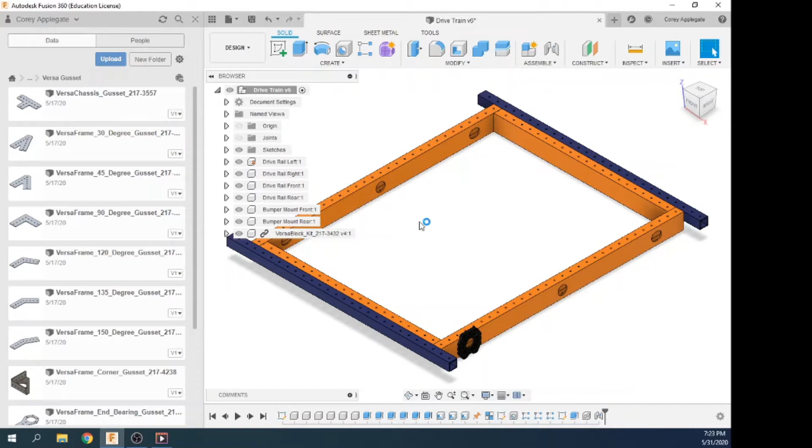To get started, I already added one of the Versa blocks to the lower left corner. We need this to show you a small collision that we have and show you why we have to modify our corner brackets. To begin, I'm going to go to our assets library. Picking Versa gussets, I'm going to find the 90-degree gusset and drag it into our project. I'm going to rotate this to better fit this front corner and bring it down here a little bit closer to where we're going to assemble it.

This time we are not going to use the rigid group. We're going to actually apply a joint. In the joint command there are many different types of joints. There's the rigid, the revolute, the slider, cylindrical, pin slot, planar, and ball. There are many YouTube videos that go through each one of these in great detail. Today we're only going to look at the rigid.

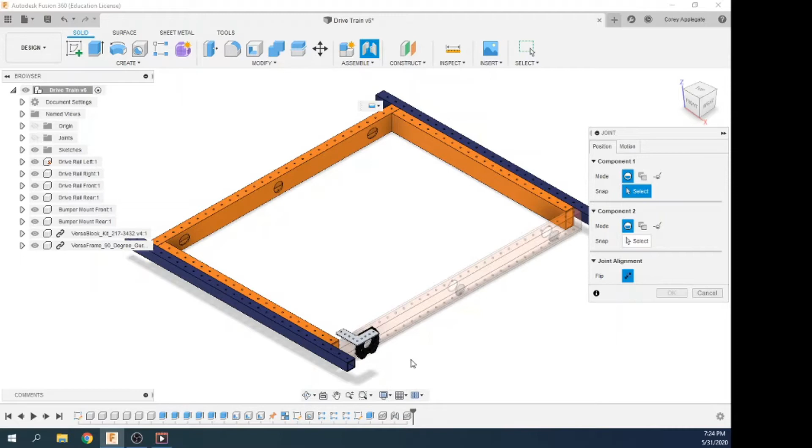Rigid is already selected. I'm going to pick my first component. You can see that one component is grayed out because that component cannot be selected since it is grounded. All the other ones could potentially move. I am going to first select a point on the bracket. The first part that we select will be the part that moves towards the second one.

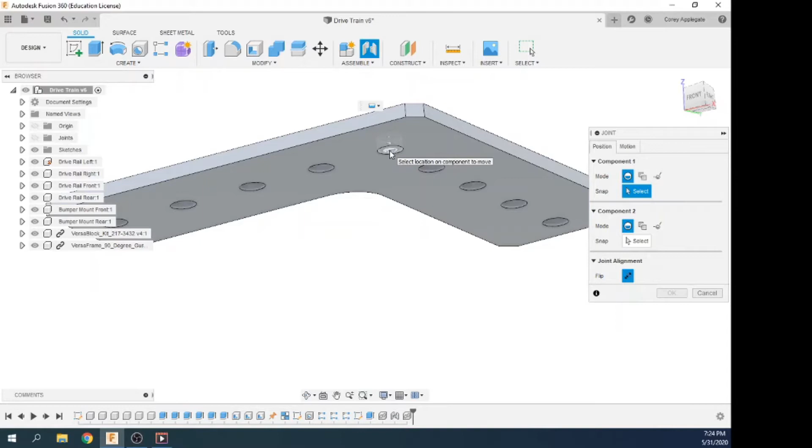When I mouse over to this lower plane, these X's up here are different points that I can select as a joint node. Selecting this corner node on this plane to this bottom. Now, getting a view to the robot, you can see those same joint points show up. Pick this circle here, top plane, center of the circle. Since we had the rigid command, a small animation shows you how that's going to work, and I can hit OK.

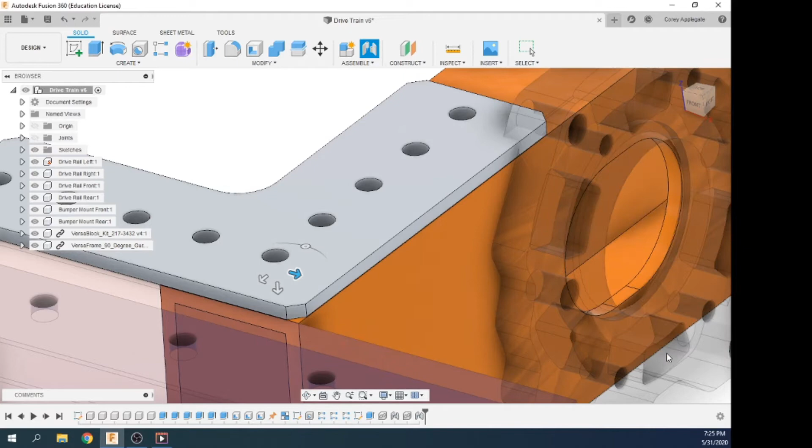Right away you can see why I brought this part in. You can see as we adjust this back and forth, we'll always have a collision with this bracket. So what we do is we cut these first two holes off. Right now this is linked to the asset library, so any changes we make to it will change the asset. We're going to break this link so we have our own component to work with.

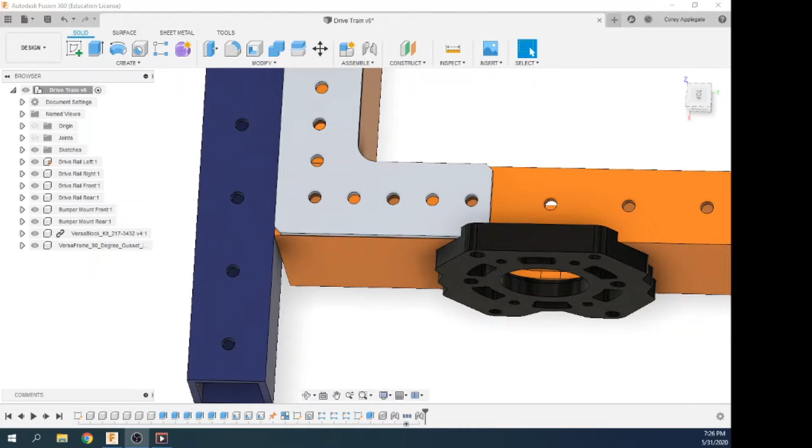Activating this component, we are going to cut this end off. We're going to select Create Sketch. We're going to create a sketch on top of this part. I'm going to draw a construction line from the center of the third circle to the center of the second circle. I'm then going to draw a rectangle using normal geometry, just larger than the area that I want to cut.

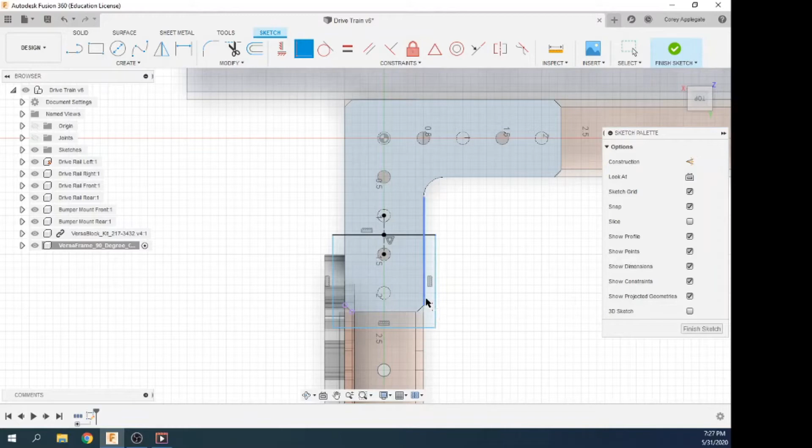I'm going to apply a coincident constraint using the shift key, grabbing the center of our box and locking that to the center of this construction line. This will be all fine. We can use this box to define our cut. Finishing the sketch, we're going to grab the extrude, select this entire profile, and again either drag the arrow backwards to cut or come over here and select Operation Cut.

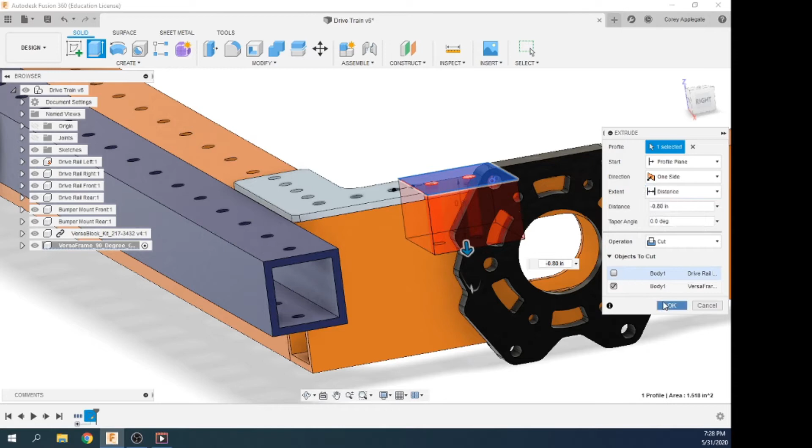You can see here as I drag down, this is going to cut both the bracket and the tubing. We do not want it to cut the tubing, so we can come down here and make sure of that by going to Objects to Cut and deselecting the drive rail, as well as picking the To Object distance and grabbing the bottom of our bracket. Here I'm just going to go with this operation to finish the cut.

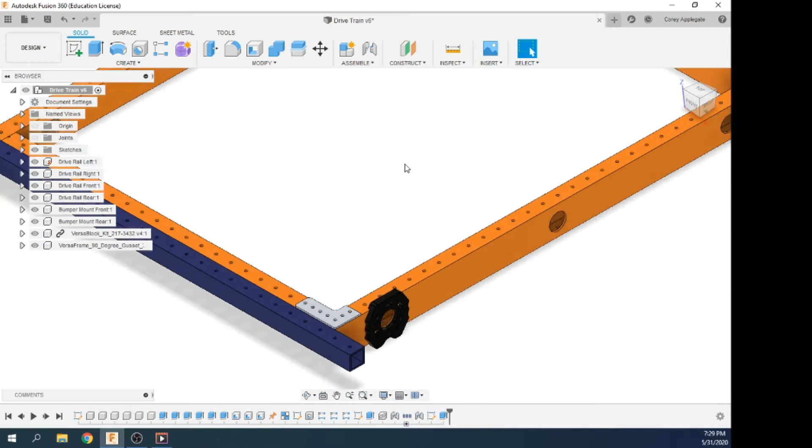With this bracket now cut, you can see when we go to the top view, as this first block adjusts back and forth, there's no longer a collision. We are now going to copy this bracket and attach it to the rear. Since we are trying to create a dynamic chassis, I'm going to first simply copy this and attach it to this hole right here, but you'll see there's a problem, and I'll show you the solution.

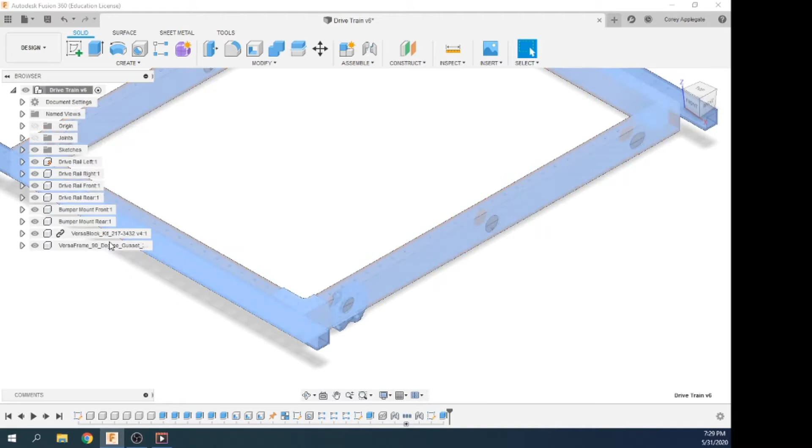So first, by selecting the gusset that we have, using Control-C to copy, paste new, and I'll shift this bracket to the other side. I'm going to flip this bracket over 180 degrees to get it in the right orientation. I'm going to raise it just so I can see underneath it a little bit. Hit OK.

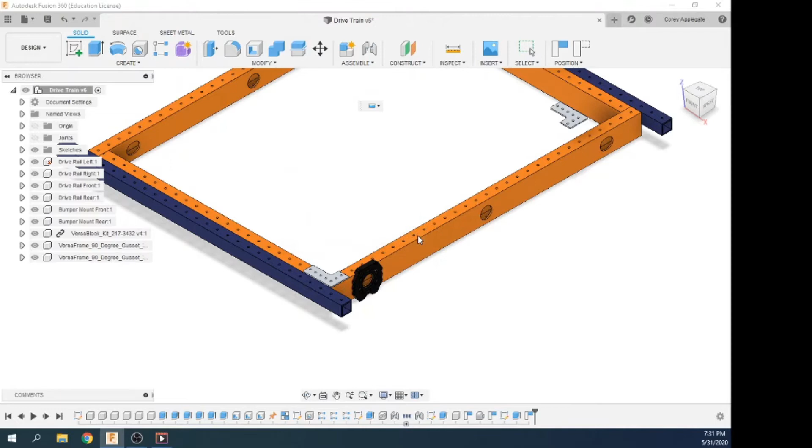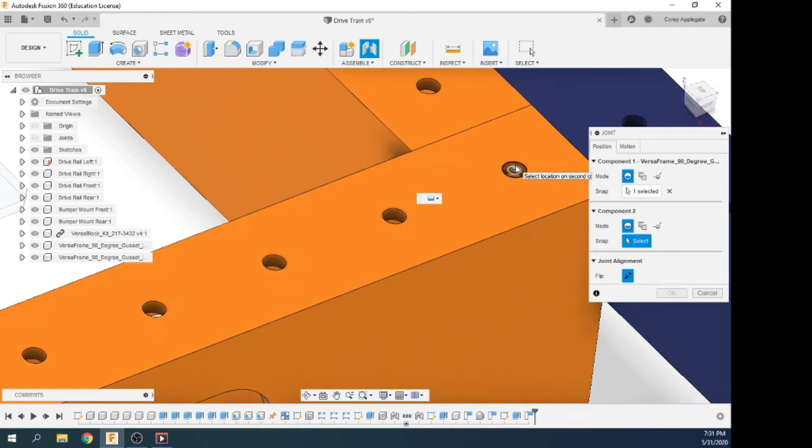I'm now going to go apply that same joint, selecting joint, capture position, select this first point in this corner, select this last circle. You can see our rigid joint is now created. Okay.

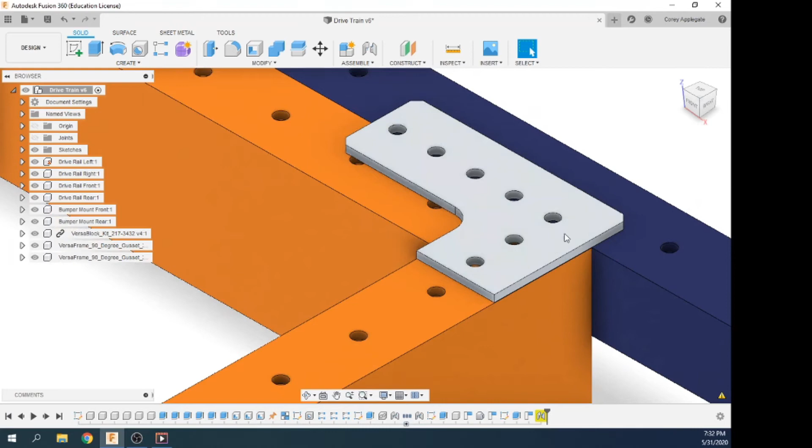Now this looks fine, but what if we were to go and modify this chassis? Say we get to next year's design and we decide we don't want that 33-inch or 32-inch robot. We want a 31-inch long robot. You can see what happened is this bracket did not move because that was attached to a hole, but now if I hide that, it's out here. That hole disappeared because we cut an inch off this chassis. So what we will need to do is use that parameter to adjust this bracket.

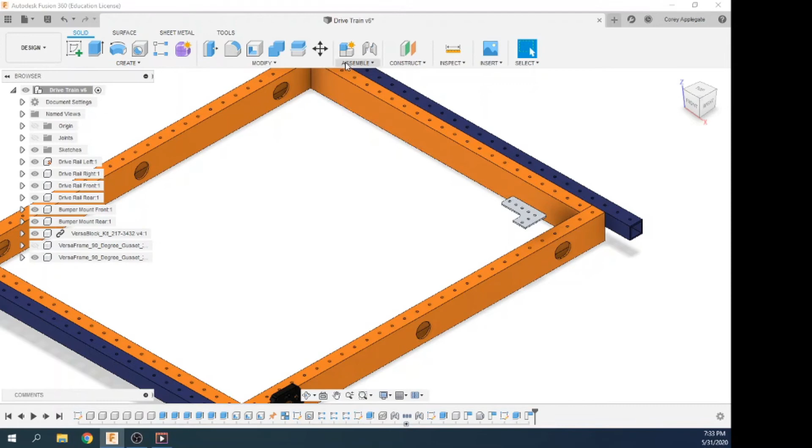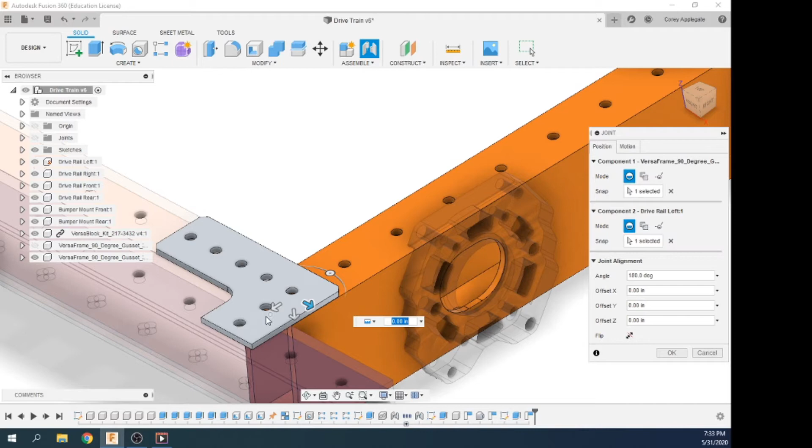Undoing these past few changes, deleting this rigid joint, what I'm going to do is hide our first gusset. I'm going to join this part to the same point that drives all these holes. The bracket's in the right orientation, but obviously in the wrong spot. What we can do is we can create a Y offset.

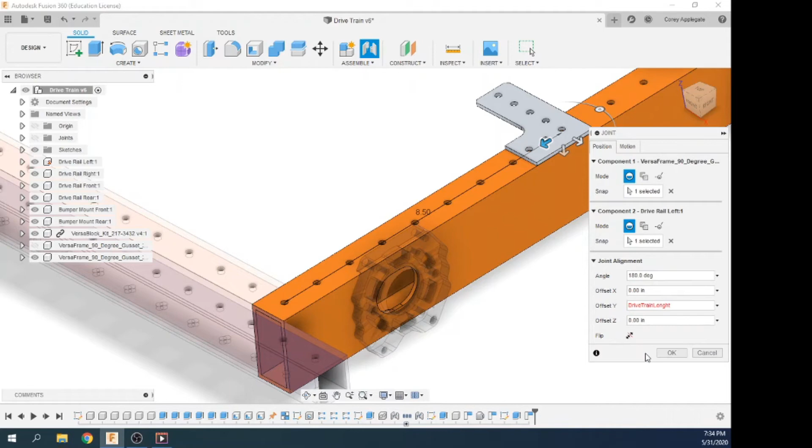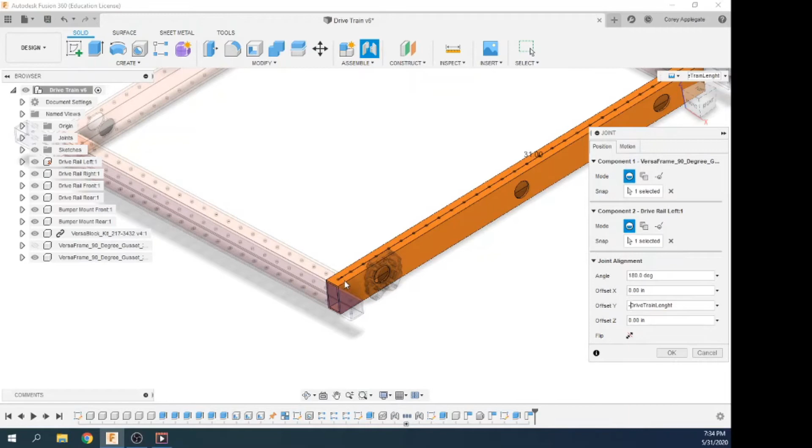You can see this Y offset go more and more negative as I move it closer to where it's supposed to be. So what we can use is that parameter we created last week, drivetrain length. We want to make sure that's negative to go in the negative direction. You see it put it way out here beyond the chassis. That's because our drivetrain length includes these two 1-inch 1x1s, plus they're a 1/2 inch in on each side. So 1.5 inches and 1.5 inches. If we want to drive that closer, we can add 3 inches to that part. Hit OK.

I can turn on this bracket, and now no matter what we do, when we change these parameters, that bracket will adjust accordingly.

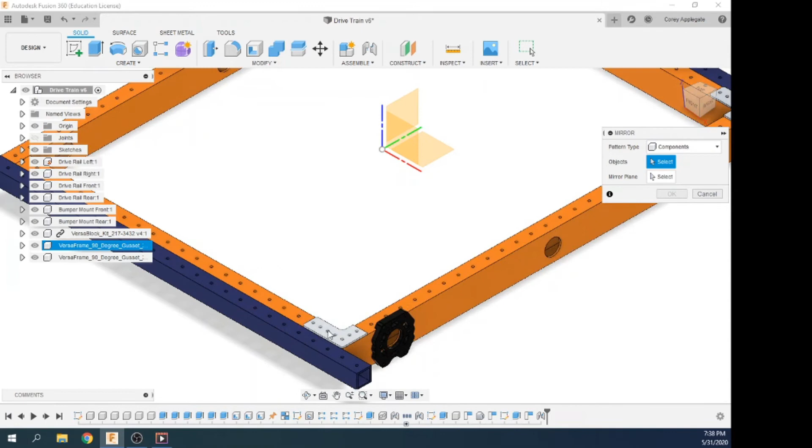Now with both corner brackets turned back on, we can now just use the mirror tool to mirror these to the other side and to the bottom in 2 steps. Since our chassis always grows and shrinks relative to the origin, that makes this possible. I'm going to create mirror, select components if not already selected. You can either try to select the components on the model or come over to the tree and select the 2 components, which is sometimes easier. Select the mirror plane, selecting the YZ plane, and OK. You can see those parts are now there.

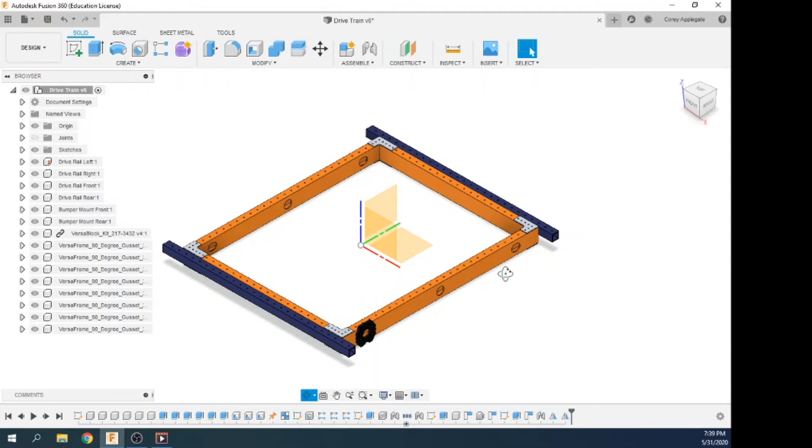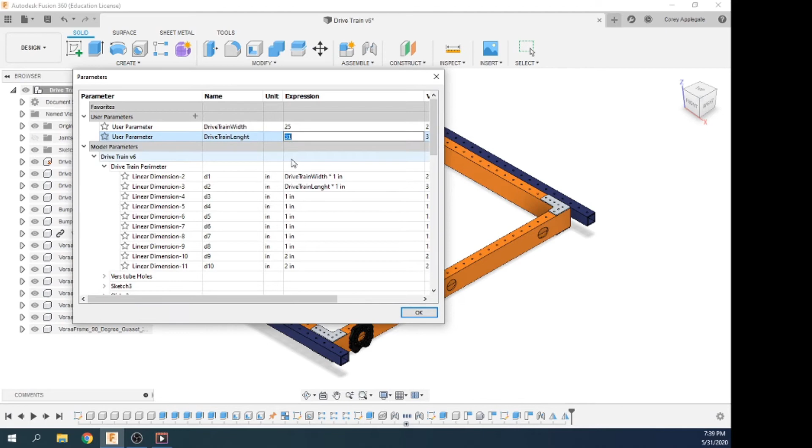Doing this again, create mirror, pattern type with components, select the 4 brackets, select the mirror plane, the XY plane, OK. You can now see that simple. We have our 8 corner brackets. Now, if we change parameters, change the width of our robot to 25 inches maybe, and the length back to 33, since this is all tied to the origin, that mirror pattern always works, dragging those corner brackets to where they need to be.

With most robot models that we build, we skip over the rivets and screws. Sometimes having all these individual parts in our models will degrade the performance of our computers. I'll return the chassis back to our starting size of 27.5 by 32 long.

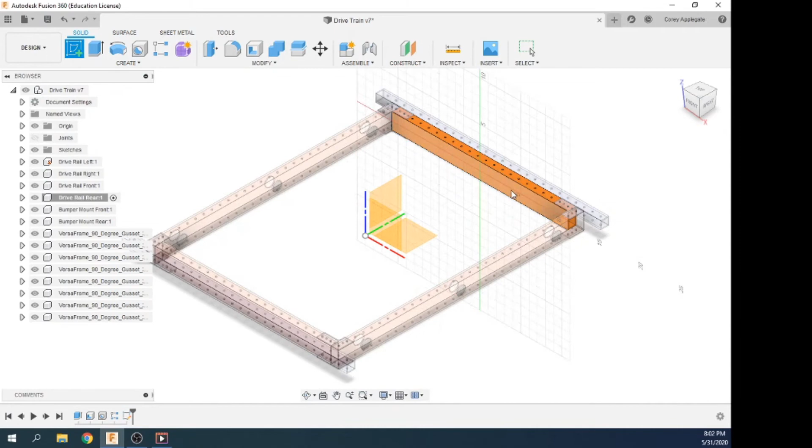Now with the rails having a way to attach them permanently together, it is time to add the features to attach our bumper rails permanently to the chassis. To do this, I'm going to first activate the drive rail rear so we can modify that. I'm going to create a sketch on this plane here. To see things a bit better, I'm going to tip it down and zoom in a little tighter here.

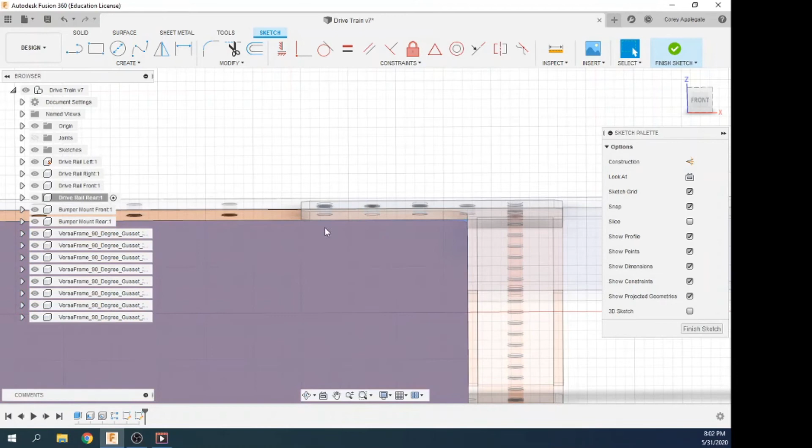I need to drill a hole ½ inch down, and to keep everything symmetrical and lined up, I want to grab this top hole feature. To do that, I'm going to first add a point roughly where I'm going to drill my hole, and I can add a dimension from this top edge to this point at 0.5 inches.

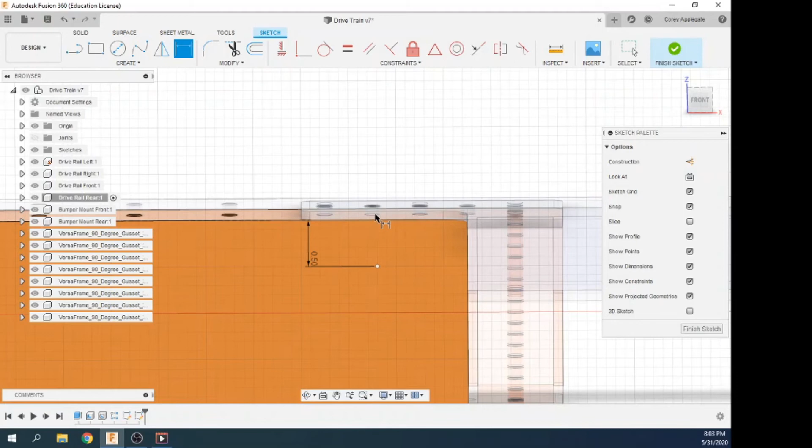To find out where that hole is relative on this edge, I need to project that hole to this edge. I'm going to first hide the gusset so I can see the hole a little better. Create, project/include, project. I'm going to project this hole. You can see here that a purple line has appeared on our sketch plane.

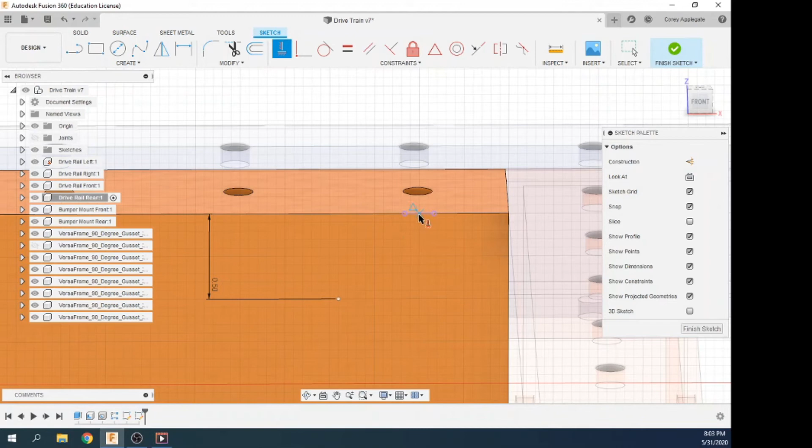I can now use the horizontal vertical constraint, holding shift, find the center of that projection, then selecting the point. You can see now that that point is fully constrained. I'm going to finish this sketch and now add a hole to this point.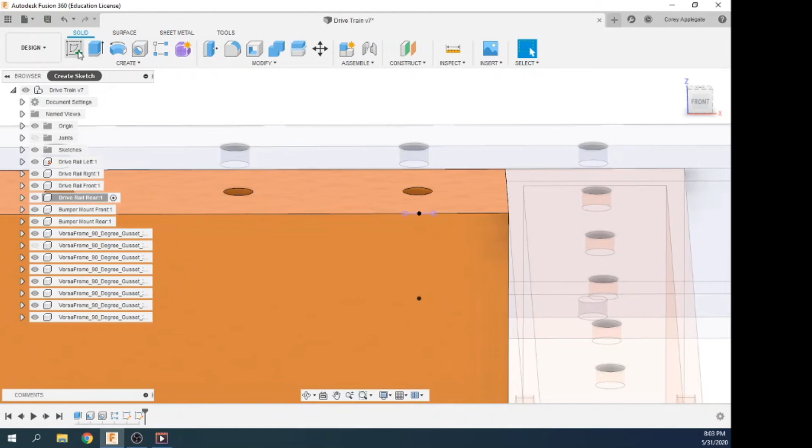How we attach these bumper rails is we install a screw threaded in as a stud and then slide the bumper rail over there. I'll show you how. So we're going to add a hole at this point. We're going to use this counter bore hole to cut a large hole for access, as well as select tapped hole. The counter bore hole we use is 3/4 inch.

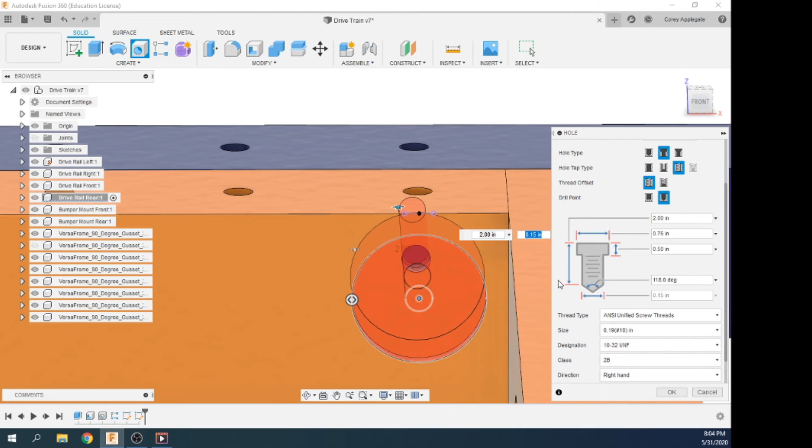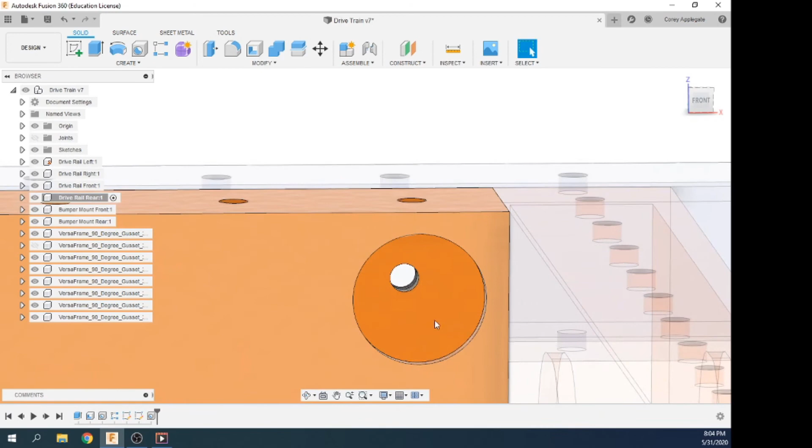The screw is going to be a number 10-32, and then we'll select OK. You can see this drilled a hole through both our rail and our bumper with threaded holes. That is fine. We'll use that feature from the other side later on.

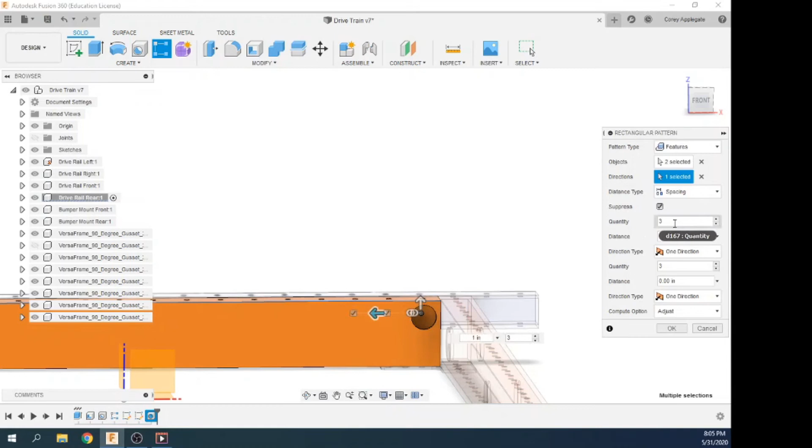We now need to add a few more holes along the side of this rail to attach this. We're going to use the pattern. We're going to pattern feature by selecting the hole. We're going to select a direction, grabbing this edge of this rail. Spacing, 1 inch apart. We want 4 of them. We don't use all 4, but since we're here, we like to add a few extra holes just in case we need them or if threads get stripped out.

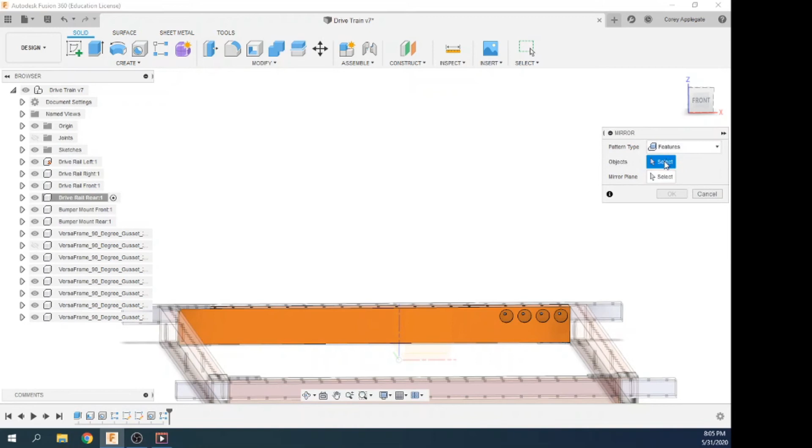With these 4 holes, we're going to add 4 more to this other side. We don't have to draw them. We can use the mirror. Create, mirror, features, objects. We're going to grab first the original hole and the pattern. The mirror plane will be this YZ plane. Okay. Those 4 holes are now on the other side of our rail.

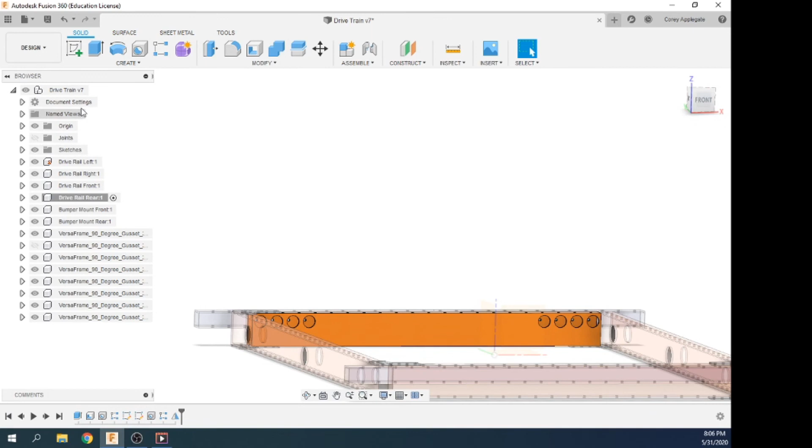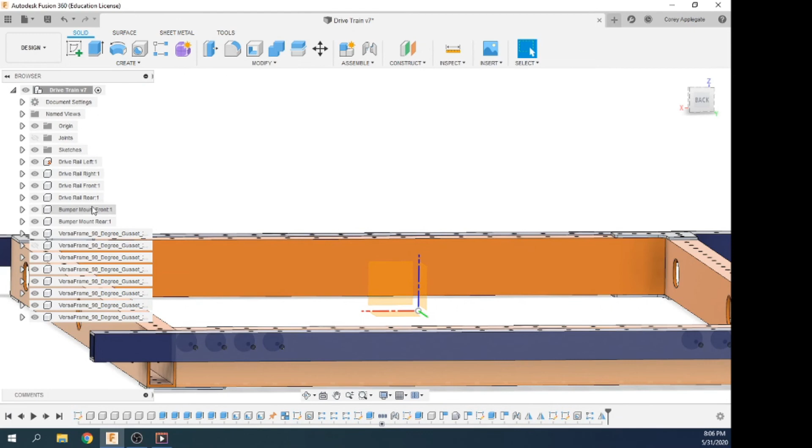If we go to the top level and spin around and view from the rear, you'll see these holes are all drilled all the way through. We are now going to add that similar hole pattern to this back side. So how we're going to do that is we're going to activate our bumper mount rear. We are going to draw a sketch on this backmost plane.

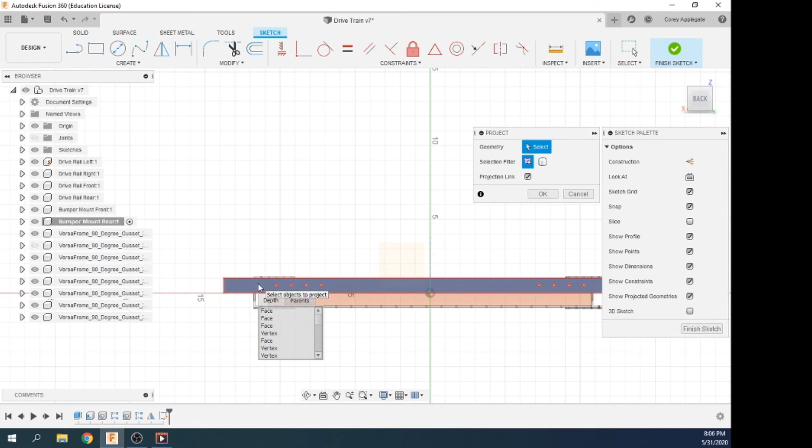We need all these features so we can project by going create, project include, project. I'm going to project this entire rear profile. Okay. Finish sketch. Going to create a hole, selecting each one of these points since they're here.

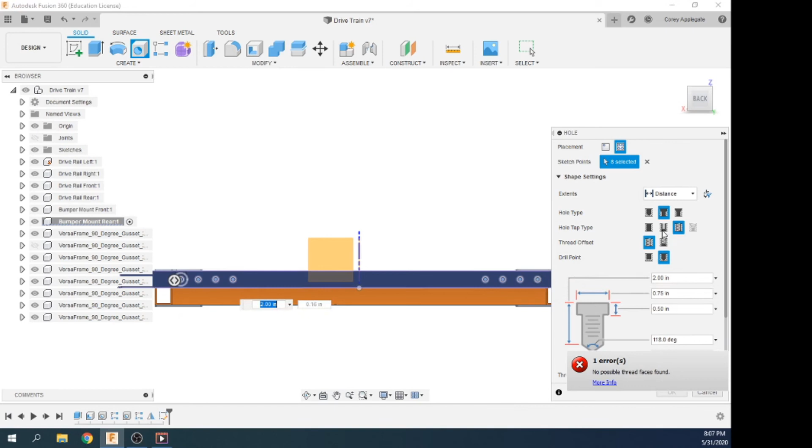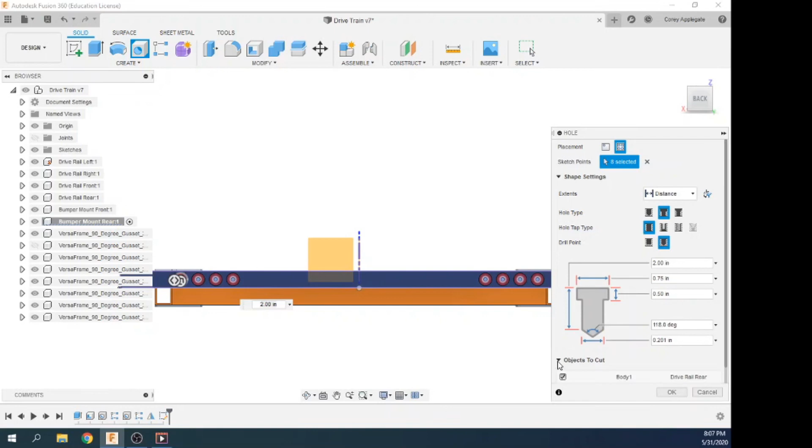This side we do not want to be threaded. We want it to be clearance holes, so we'll select the simple hole. We use a number 7 drill bit for a clearance hole, which is 0.201. We want to make sure that we're only cutting the rear bumper mount and not the threads out of our rear rail. Objects to cut, deselecting drive rail rear. Okay.

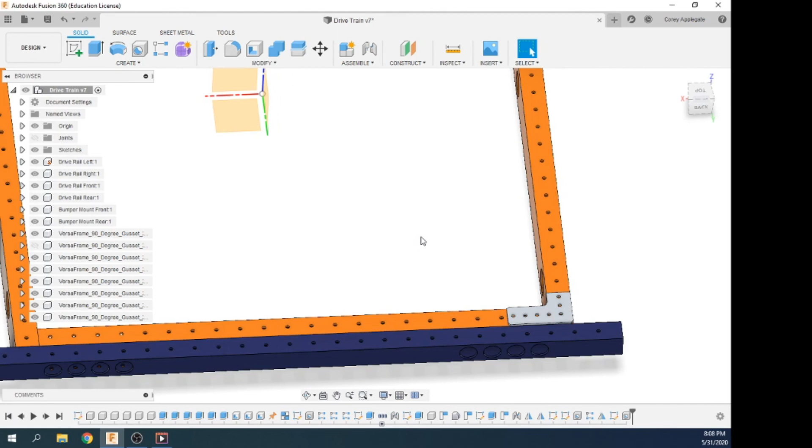Now activating our model, we can look straight in the back and we'll see we have our threaded drive rail and clearance hole for the bumper. We can now take a 10-32 screw from the inside, stick it out, and using a deep wall socket, add a nut on the inside of this rail.

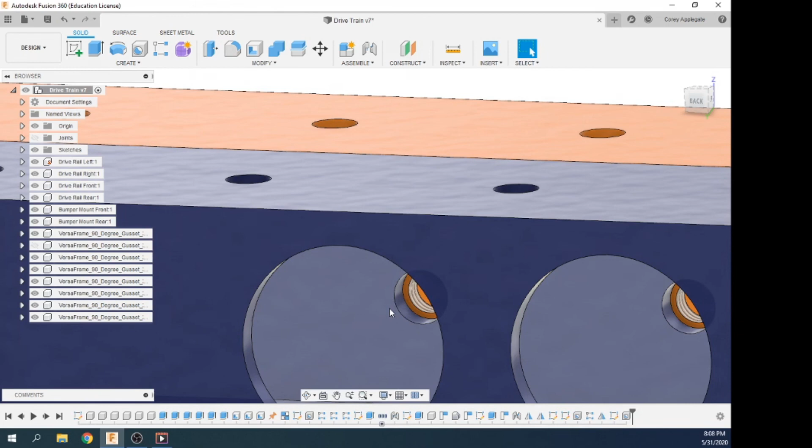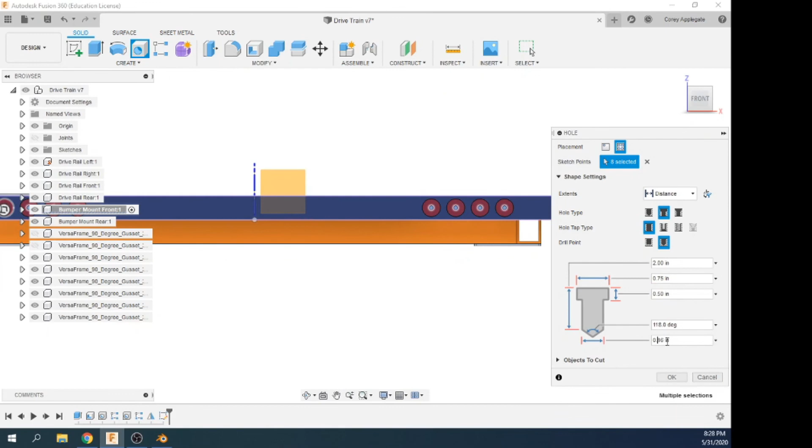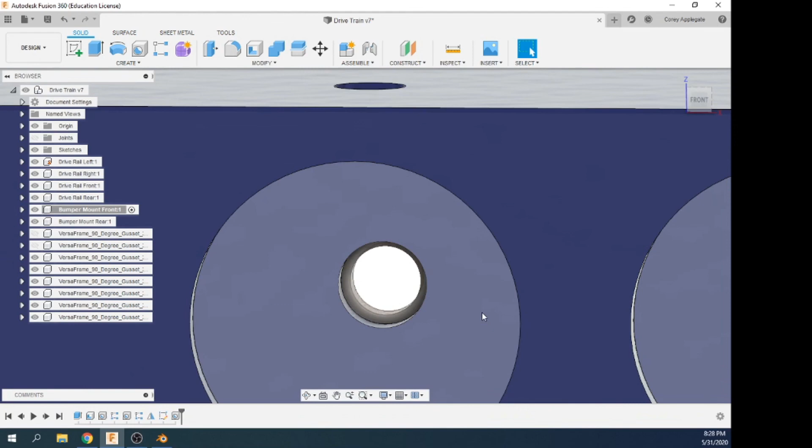We are now going to repeat those same steps to the front, and I will fast forward through those. Okay, so you should now have the same as we had in the rear: a tapped hole in the drive rail with a clearance hole in the bumper mounting rail. That is all for this week. Well, let's turn these brackets back on so we can finish this and save our project.

That concludes building the 2020 Granite City GearHeads chassis. Next week we will start a new assembly, importing this drivetrain into it, and adding the gearboxes and axles.